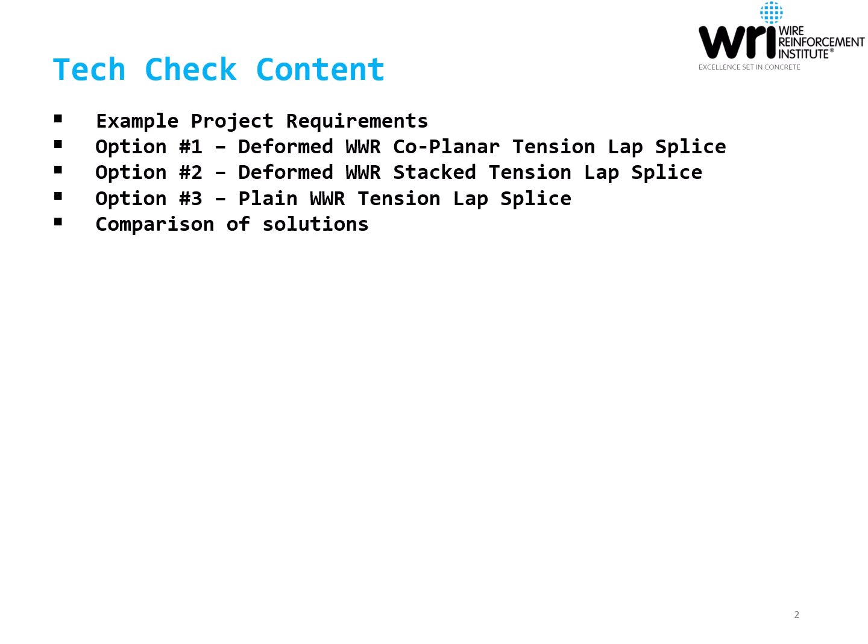So for this tech check, we'll start with an example project to set up some parameters that ultimately inform how the reinforcement can be configured to satisfy an engineer of record's design intent. With the criteria established, we'll then walk through 3 different welded wire reinforcement options. To wrap up, we'll do a side-by-side comparison of the 3 solutions.

So for our example project, we define these requirements. We'll assume a 6-inch structural slab on ground, a 100,000 square foot building footprint. The engineer of record has prescriptively specified an area of steel of 0.17 inches squared per linear foot. Also has prescriptively defined a maximum and minimum spacing as noted, 10 inches and 4 inches on center. There is 1.5 inches clear cover from slab on ground top surface.

We'll assume a steel reinforcement design yield strength of 60 KSI. The concrete design compressive strength will be f'c is 4 KSI. We're using normal weight concrete, and it will be required to have a Class B lap splice per ACI 318. So the welded wire reinforcement solution here would be a 10 by 10 D14.2 by D14.2 for deformed wire, or a 10 by 10 W14.2 by W14.2 for plain wire.

This 14.2 nomenclature simply corresponds to 0.142 square inches, and providing that at 10 inches on center gives an equivalent of 0.1704 square inches per linear foot, which of course satisfies the engineer of record's requirement.

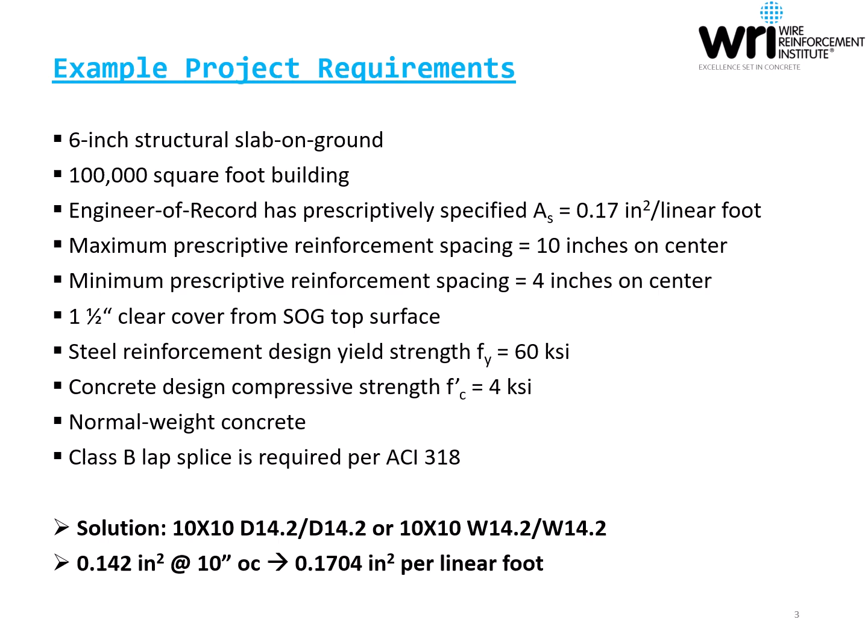With the project parameters established, we'll look at our first reinforcement option, which is comprised of deformed welded wire reinforcement that is configured to achieve what we would refer to here as a coplanar lap. This simply means that the welded wire reinforcement mats, when installed, are able to occupy the same plane without stacking up or creating an unnecessary buildup of reinforcement. This type of lap splice is based on contribution from the deformed wire surface only, so there is no benefit derived from the welded cross wires themselves. In other words, and as we will show in subsequent slides, this lap splice ends up being calculated identically to that of individual pieces of rebar.

If you look at the illustration here, note that the lap splice is intuitively measured as the overlapped horizontal distance from the end of one mat to the end of the second mat. Additionally, in practice, a welded wire reinforcement detailer will typically configure these mats to have overhang dimensions that allow for an uninterrupted typical spacing of the wires that are oriented in the direction perpendicular to the lap splice. So this ends up being really convenient for the placing crew, as there's no guesswork when it comes to laying out the mats. Basically, the overhangs themselves serve as a sort of built-in tape measure, and the final installed arrangement of the mats is able to maintain the typical spacing of wires throughout.

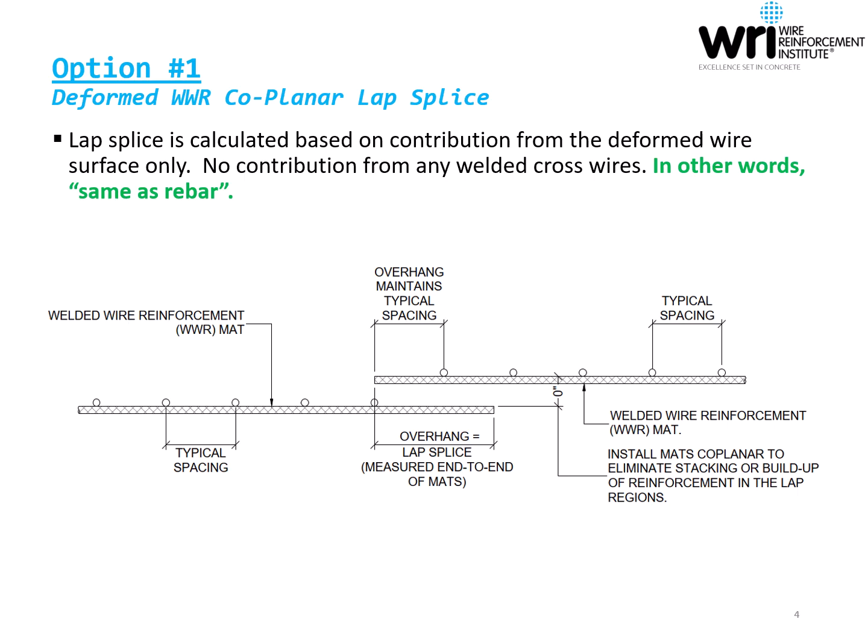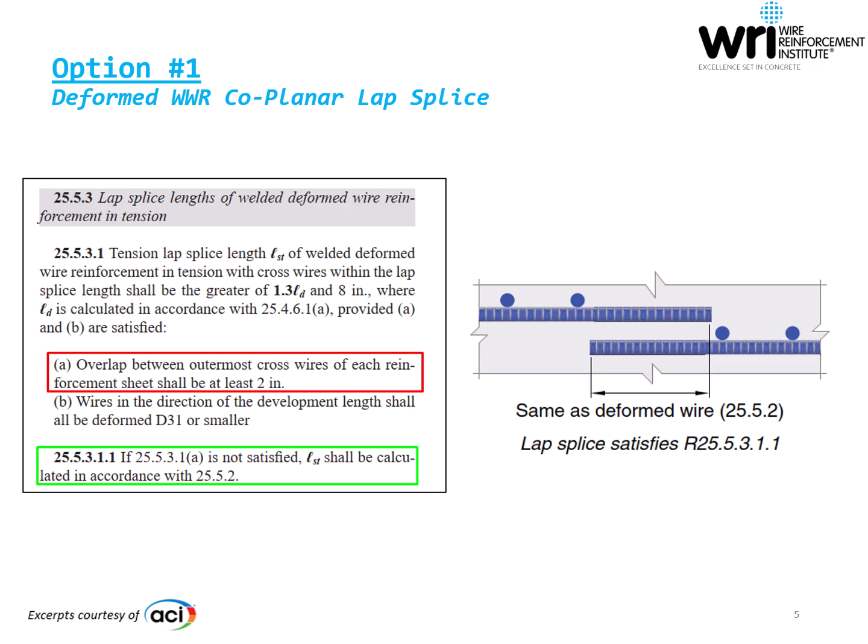The trigger for a coplanar lap splice can be seen in ACI 318 section 25.5.3. Looking at note A, we see that a traditional deformed welded wire reinforcement lap splice would require mats that stack in such a way so as to ensure that there is overlap of cross wires. In the absence of this overlap of cross wires, however, we're actually kicked to section 25.5.3.1.1, where we are directed to essentially disregard section 25.5.3 and head over to section 25.5.2. Section 25.5.2 covers lap splices for individual deformed bars or deformed wires. This actually should look fairly familiar.

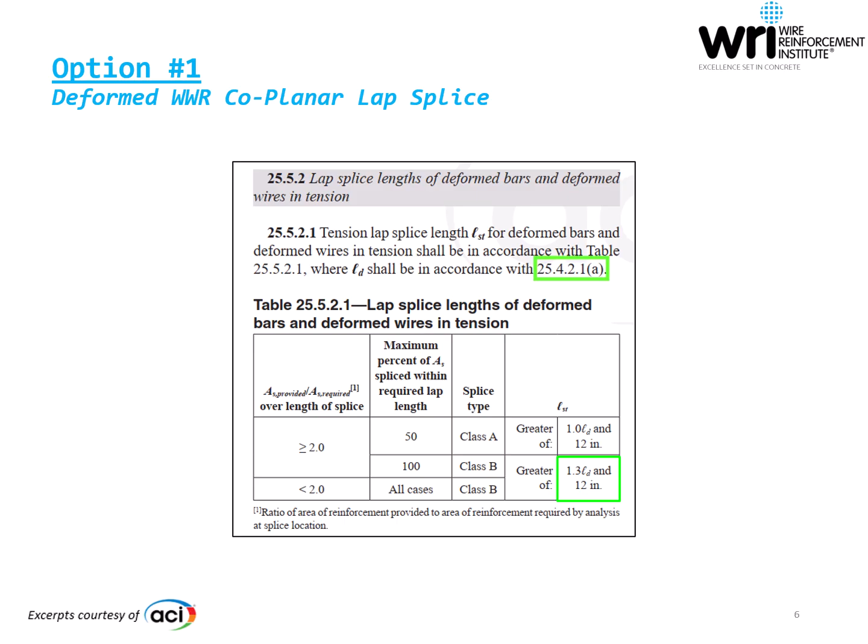So what ACI is telling us is that if we don't have cross wires in the lap splice region of a deformed welded wire reinforcement mat, we derive lap splice length the same way we do for rebar. Since the original problem statement indicated that a Class B lap splice is required, we see here that our lap splice L sub ST will be the greater of 1.3 times L sub D and 12 inches. To find L sub D, section 25.4.2.1a applies.

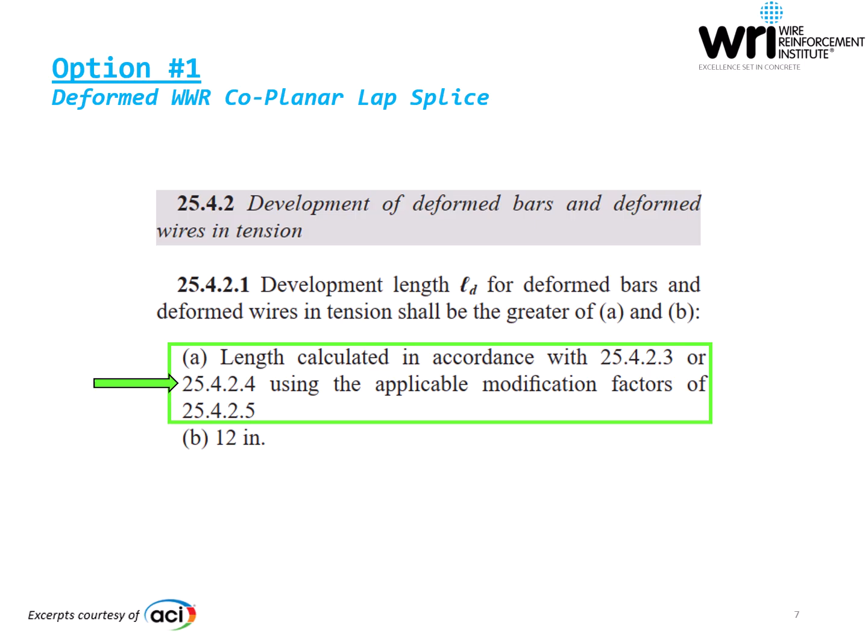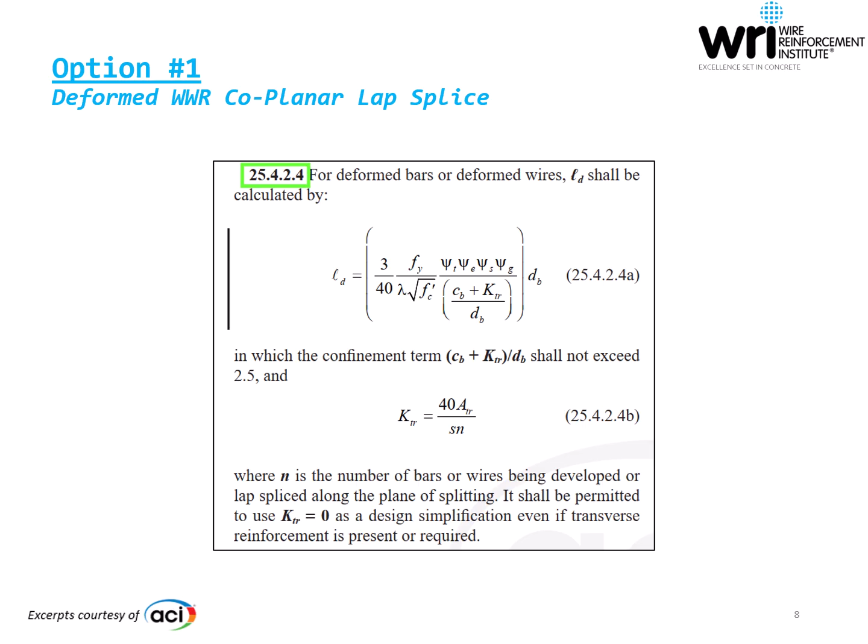In section 25.4.2.1a, we are given a couple options. For this example, we're going to go ahead and use the expanded equation in section 25.4.2.4 to derive L sub d. And here is the expanded equation for L sub d, which should, again, look familiar to anyone who has calculated the development length for individual rebar or individual deformed wire.

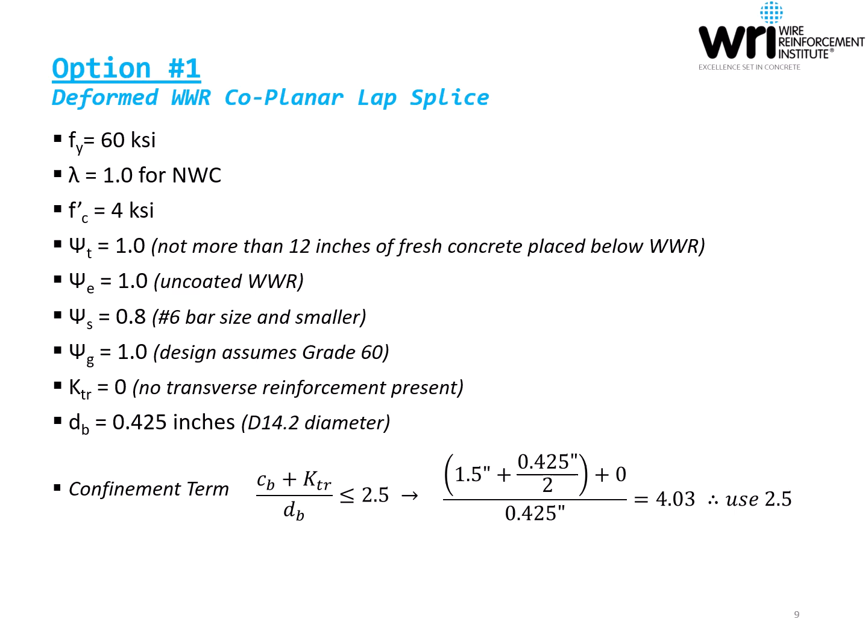If we plug and play then, here are the applicable attributes, including the appropriate modification factors. Note too the calculation of the confinement term, which yields the use of the prescriptive maximum value in ACI that is noted to be 2.5. In equation form then, we arrive at L sub d equal to 9.68 inches. We can now calculate the Class B lap splice length. As shown, we arrive at 12.6 inches. We'll round this up to an even 13 inches for convenience.

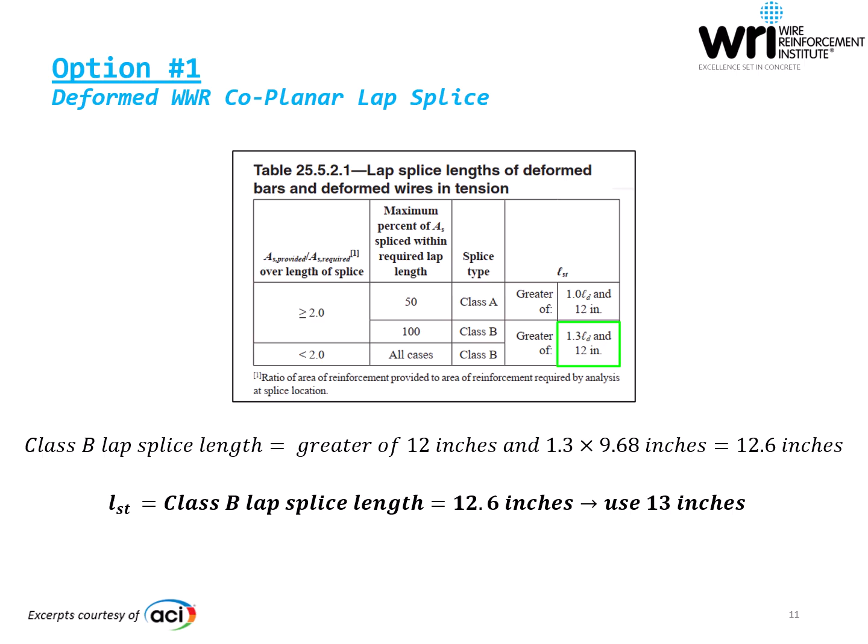Wrapping up option 1, we show the actual configuring of the welded wire reinforcement mat and its representative quantity takeoff. We're going to assume that for this project, as a function of an agreed upon preference between the welded wire reinforcement manufacturer and the contractor, the mats are going to be on the order of about 20 feet long and no wider than 8'6". The 8'6" maximum width is notable because it represents the maximum width that can be carried by a standard truck before additional oversized load permit requirements are invoked.

With all that said, note the resulting mat style here. One of the overhangs is equal to the calculated lap splice length of 13 inches, while the adjoining overhang that will be overlapped is 10 inches long. This yields an effective mat coverage of a little over 122 square feet, with effective coverage indicated by the dashed line. So the result for a 100,000 square foot slab is a gross area takeoff that gives us 819 mats. This equates to about 65 tons of steel, and these results will be revisited later as part of a comparison between the other two options.

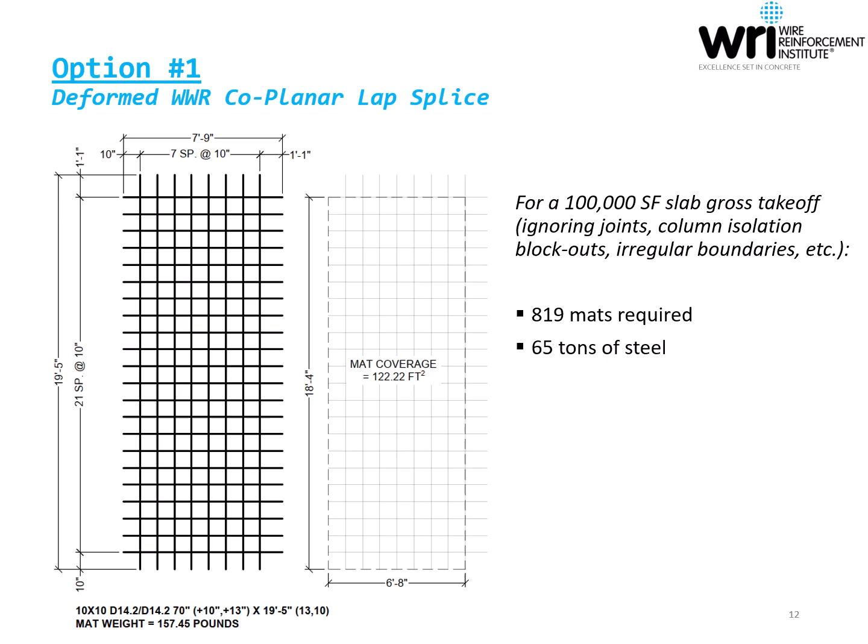Moving into option 2, we have deformed welded wire reinforcement in a stacked lap splice configuration. The key attribute to be aware of here is that the calculation of the lap splice is based on both the deformed wire surface and the presence of welded cross wires within the lap region. As you can see, if welded cross wires are in the lap splice region so that they can be relied upon to contribute to the bond and anchorage, we end up with an unavoidable stacking of the mats where they come together. It's just something to keep in mind.

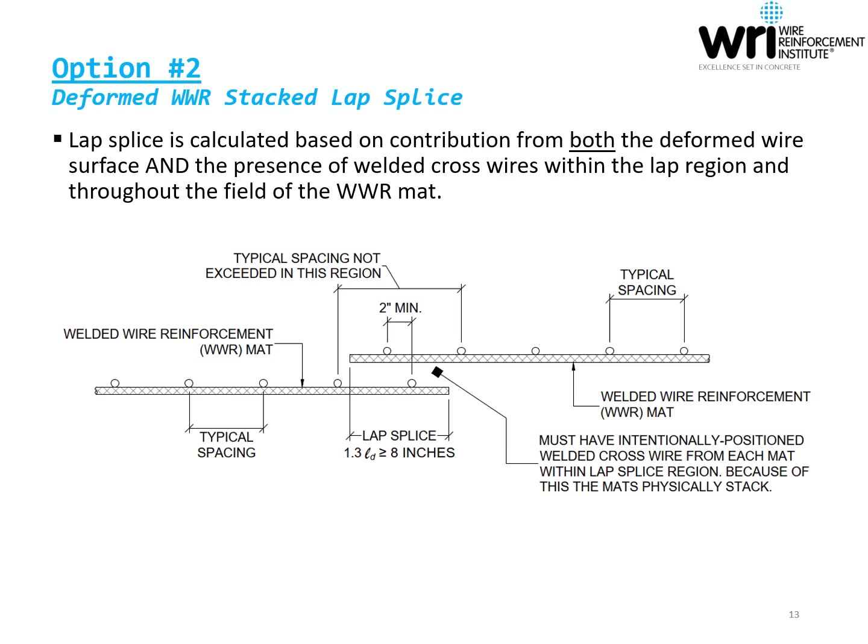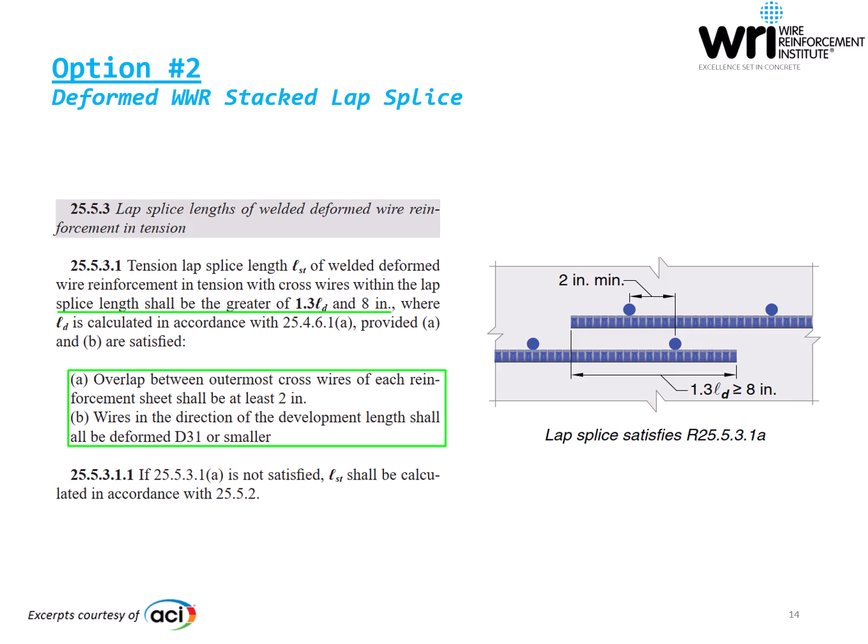Revisiting section 25.5.3, and with the benefit of the illustration shown, we see that both conditions A and B are satisfied. So in doing so, ACI tells us that the lap splice length will be the greater of 1.3 times L sub d and 8 inches, with L sub d calculated in accordance with section 25.4.6.1a. Section 25.4.6.1a kicks us into section 25.4.6.2 for the determination of L sub d.

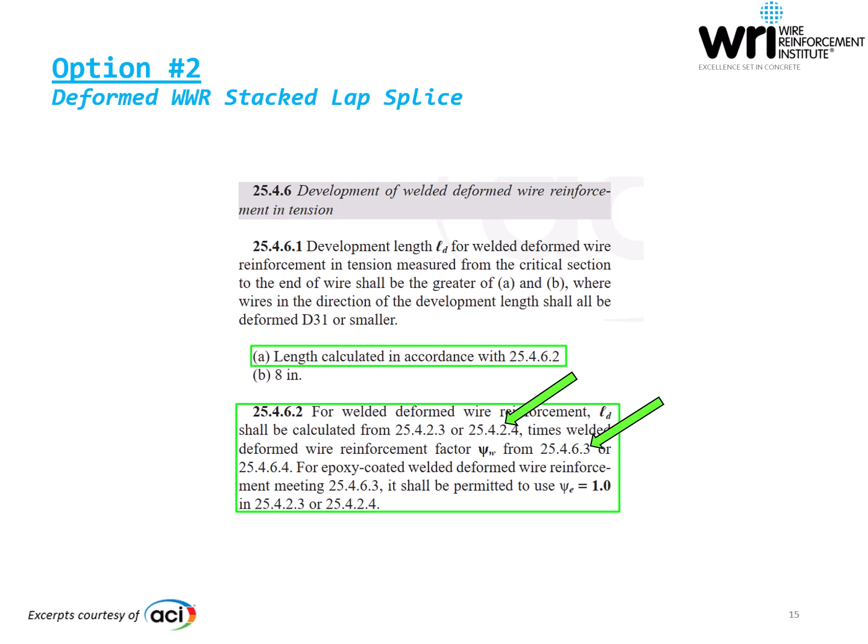The next step is nearly identical to what we saw in option 1 for the coplanar lap splice, in that we will be relying on section 25.4.2.4 again. However, there is one significant difference, and that is the application of a deformed wire reinforcement factor as outlined in section 25.4.6.3. So if we put this all together, we have the familiar expanded development length equation of section 25.4.2.4 multiplied by the deformed wire reinforcement factor of section 25.4.6.3.

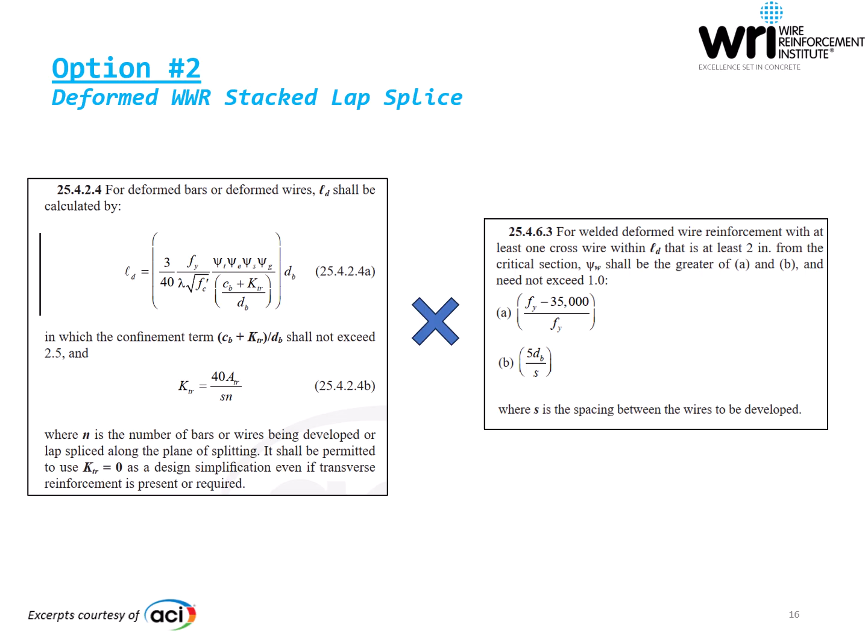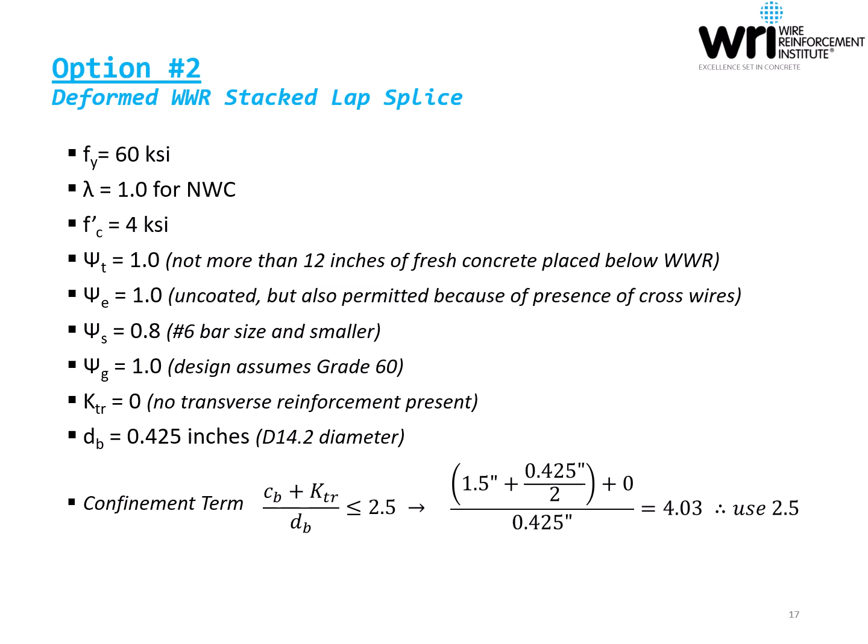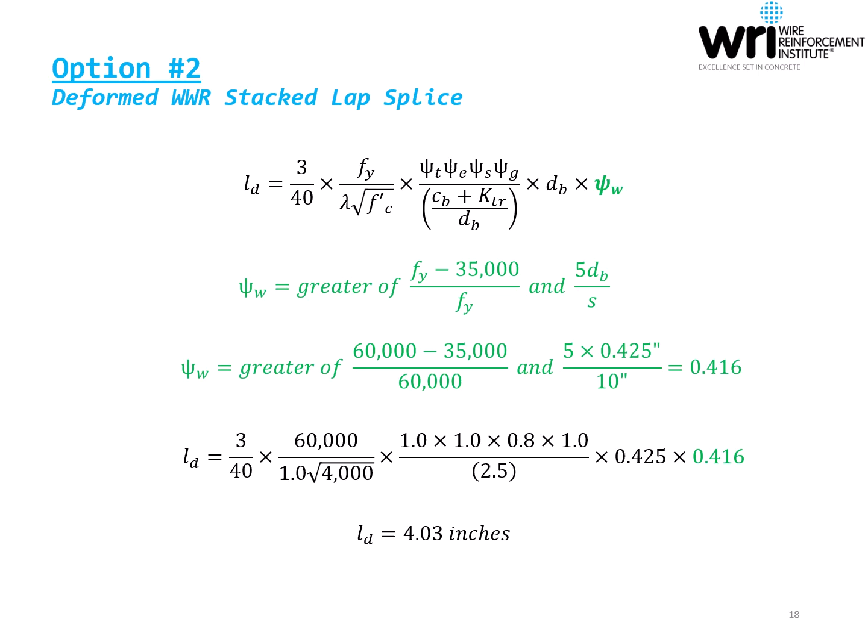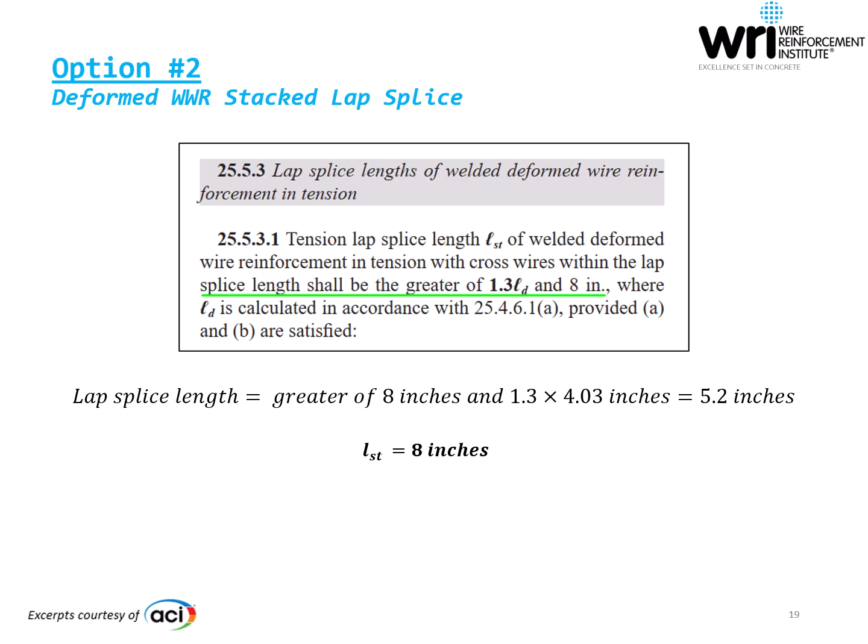Here we walk through the attributes of the development length equation. This part is actually identical to that which we had derived for option 1 previously. But we now take the result of that equation and multiply it by the deformed wire reinforcement factor. This ends up giving us an L sub d that is equal to 4.03 inches. Circling back then, we can now calculate the lap splice length as the greater of 1.3 times L sub d and 8 inches. We see clearly here that 8 inches governs.

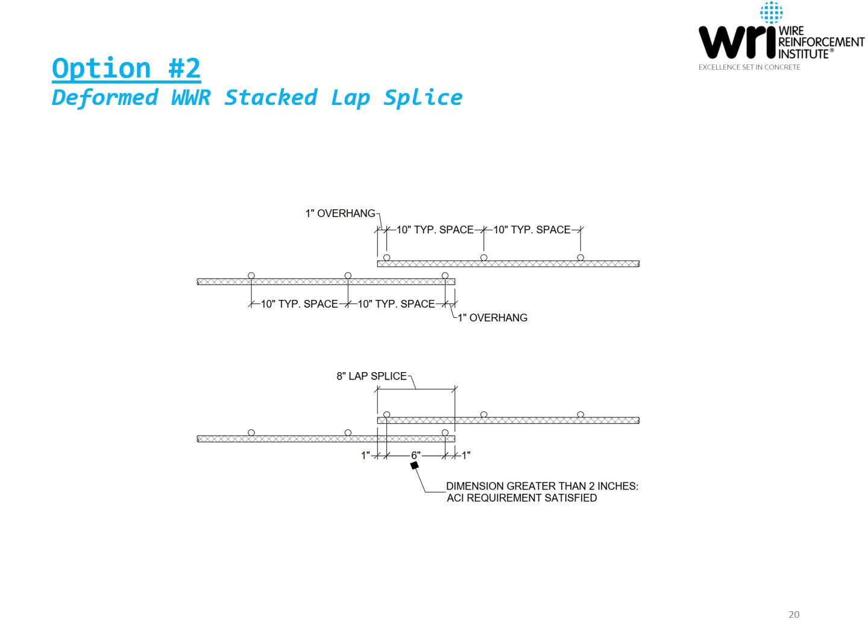So while this lap splice length is certainly shorter than what we calculated in option 1, not only is there some material buildup to be aware of due to the stacking, but there is also a bit of a disruption to the regular cadence of the typical reinforcement spacing that occurs everywhere else on the mats. This, of course, isn't impossible for the contractor to achieve in the field, but it does require a bit more attention to detail than in option 1, where we could simply use the overhang length as a sort of built-in measuring stick.

And here we see the culmination of the efforts for option 2, arriving at a mat style with coverage that is a bit more than 146 square feet. Again, effective coverage is indicated by the dashed line and is based on the overlap relationship we showed in the previous slide. From here, we derive a mat quantity and corresponding steel tonnage as representative of a gross area takeoff. You can see that the mats are fewer than what we derived from option 1, and the tonnage is actually a little bit higher.

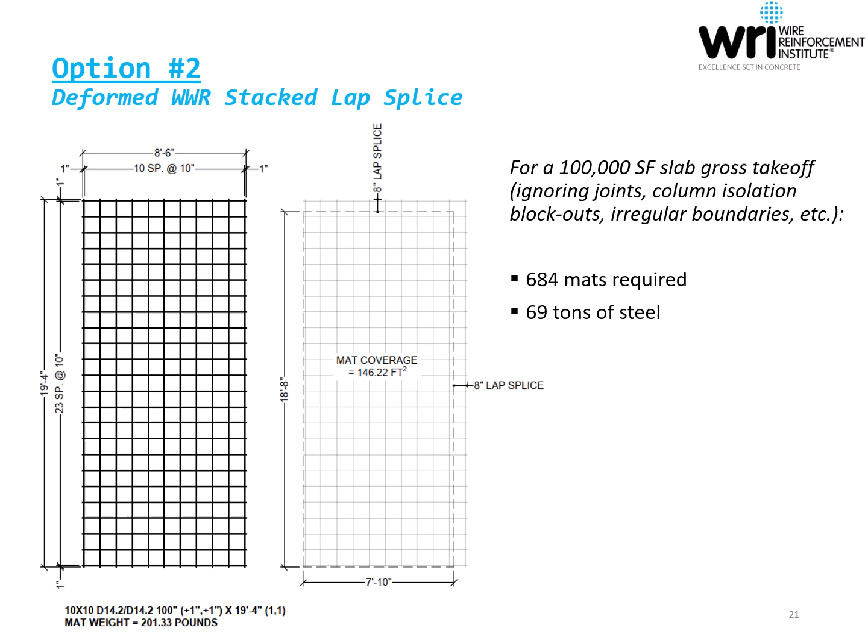It is worth pointing out that if you are going to rely on the presence of welded crosswires within the lap splice region to contribute to bond and anchorage behavior, you must also satisfy a prescriptive maximum wire spacing throughout the balance of the mat's area. And this is noted in ACI section 20.2.1.7.3. This prescriptive maximum spacing is 16 inches. Of course, we've satisfied this given that the mat we have configured here has a 10-inch wire spacing.

Again, this prescription only applies when there is contribution from welded intersections being relied upon for the bond and anchorage of the mat. In contrast, for option 1, that we previously derived based entirely on anchorage and bond contribution from the deformed wire surface only, section 20.2.1.7.3 does not apply.

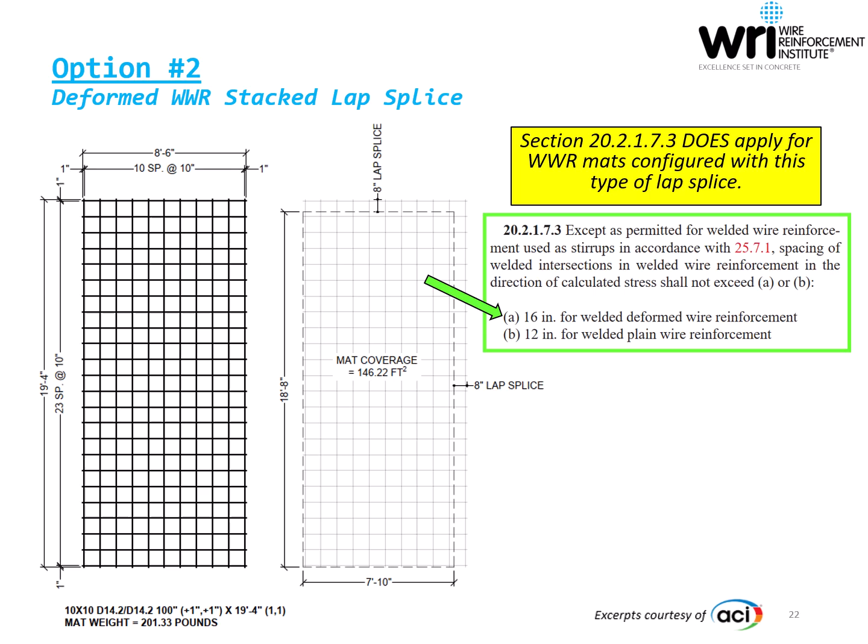We'll now move into our final option, which is comprised of plain welded wire reinforcement. For this lap splice, the bond and anchorage behavior is entirely reliant on the presence of welded crosswires. This is because the wire surface is smooth and as such cannot contribute to bond or anchorage.

Note that the lap splice dimension is measured from outermost center lines of crosswires on the lapped mats, independent of overhang, and there is an additional implicit requirement that a 2-inch minimum offset be achieved. We can see here that there is a significant departure in the ACI design routine for lap splice calculation, and that it doesn't really resemble the equations we saw in options number 1 and number 2.

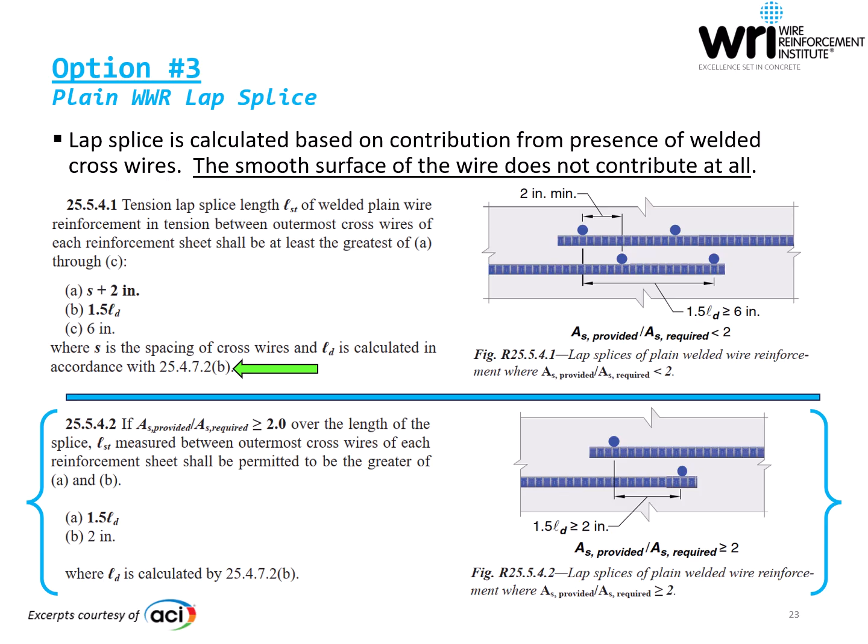Section 25.5.4.1 applies here since the ratio of steel area provided to steel area required is less than 2. Section 25.5.4.2 is also shown in brackets at the bottom, but it doesn't really apply to our example. Note the 3 different provisions listed as A through C, the greatest of which will be used as the tension lap splice length. Provision B tells us to go to section 25.4.7.2b for the determination of L sub D.

When we arrive there, we see a fairly straightforward equation, the result of which is 3.64 inches for the problem statement that we're working here. So lap splice length is the greatest of spacing plus 2 inches, which would give us 12 inches, 1.5 times L sub D, which gives us 5.46 inches, and a prescriptive value of 6 inches. So our lap splice length is 12 inches.

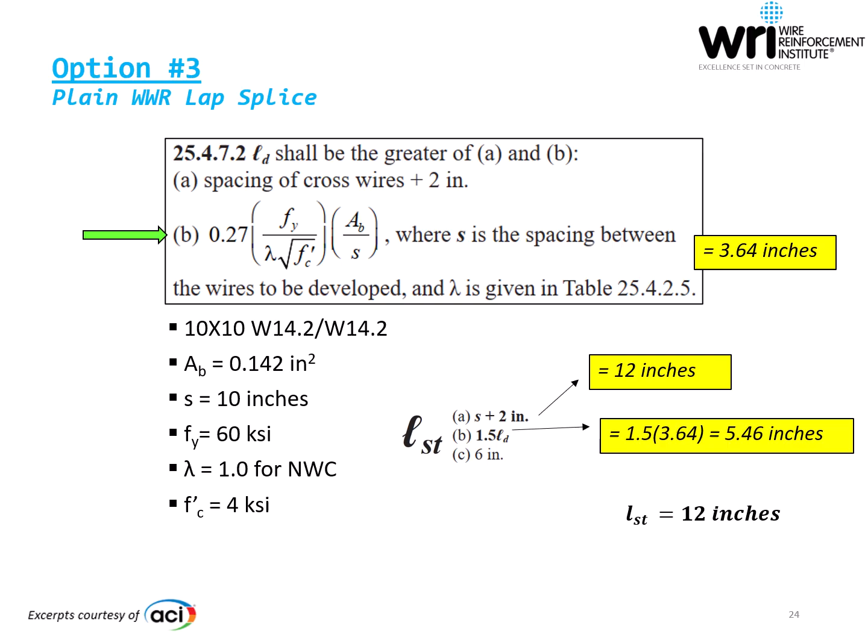With the lap splice length in mind and the requirement that we have a 2-inch minimum crosswire offset that we need to satisfy, we configure the lap splice that we show here. Note the 12-inch measurement wire to wire and the 2-inch offset that is integral within that region. While we've arbitrarily selected a 1-inch overhang here just as a representation of a practical minimum for manufacture, these overhangs could be longer. At 1 inch, note that the overall mat overlap dimension ends up being 14 inches.

But again, this end-to-end dimension does not represent the actual lap splice dimension. The lap splice is the 12-inch dimension from outermost crosswire to crosswire. Generally speaking, for plain welded wire reinforcement, overhangs that occur to the outside of the lap splice itself are structurally irrelevant, and they offer no benefit in the calculation. That said, from a reinforcement placement standpoint, it still might be prudent for the designer on their construction documents to speak in terms of mat overlap, as this could make the task of the sheet layout simpler for the contractor to keep track of from one mat laydown to the next.

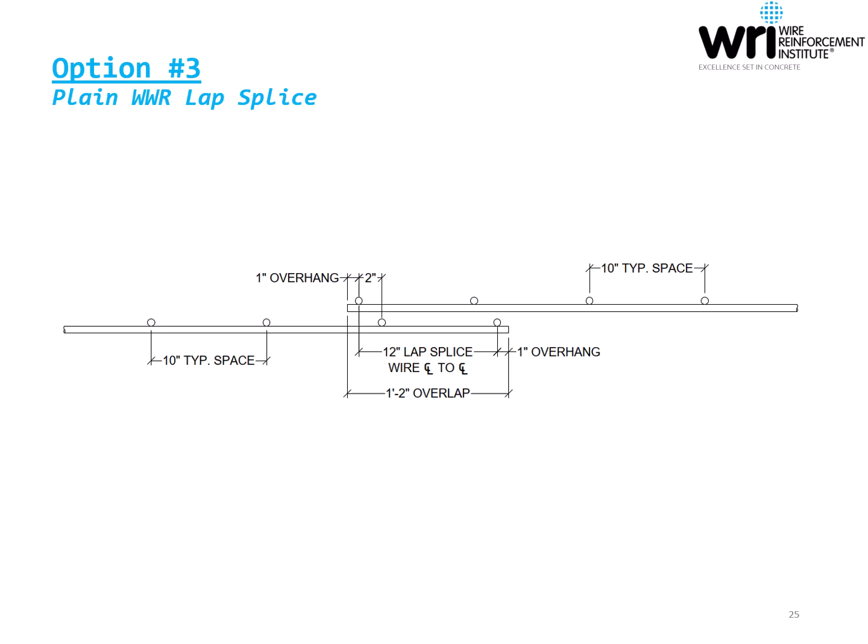Finally, note that this type of lap splice is also characterized by an unavoidable stacking of the mats given the required cross wires positioned within the lap region. Here is the culminating information for option 3, with mat quantity and steel tonnage representative of a gross area takeoff. The dashed line represents the effective coverage of a typical mat, coming in at a bit more than 133 square feet, and derived based on the lap splice configuration shown on the previous slide.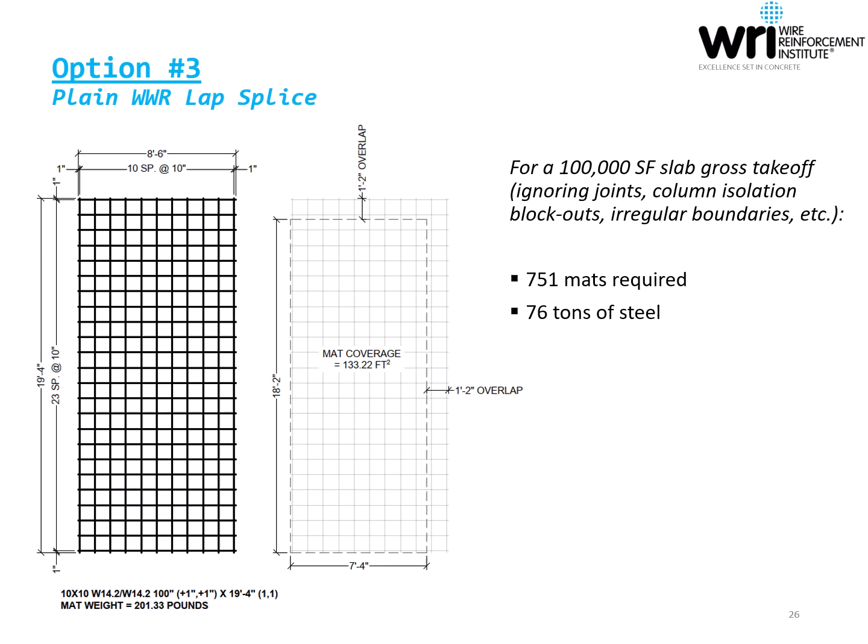Similar to option 2, anytime welded wire intersections are relied upon for bond and anchorage, other than those used as stirrups, ACI requires that there be a prescriptive maximum spacing of wires throughout the field of the mat. Here, for plain welded wire reinforcement, that prescriptive maximum is 12 inches, which we of course satisfy with the 10-inch spacing shown on the mat that will be used.

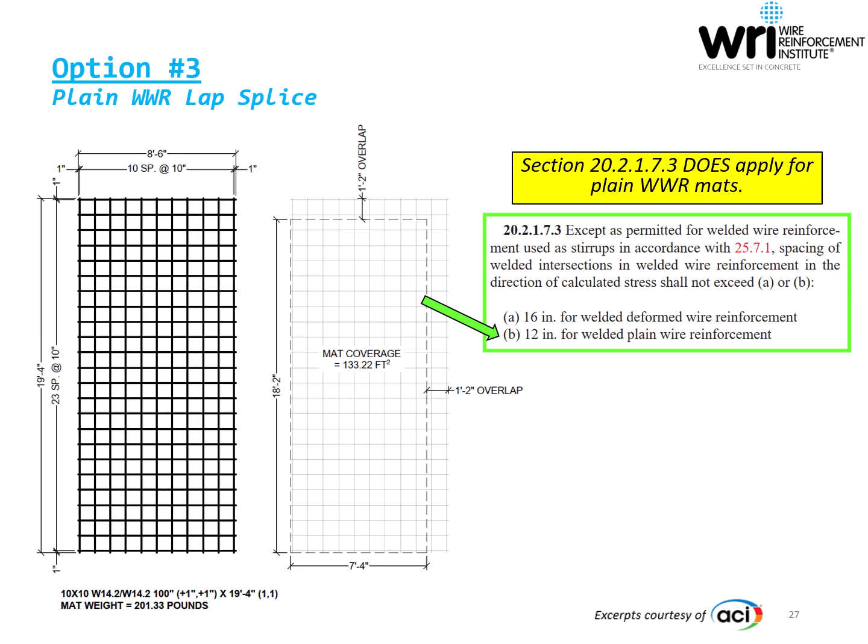Additionally, for the deformed welded wire reinforcement coplanar lap, the added benefit is that all of the steel remains in the same plane, so there's no buildup that can potentially affect steel positioning within the depth of the concrete element. This is by far the most preferable arrangement from a design perspective. The one trade-off for the deformed coplanar option is that there is obviously a larger quantity of deformed welded wire reinforcement mats, but keep in mind that these mats are lighter.

Each one of them's 150 pounds each, and that's in comparison to the other two options where the mats weigh at about 200 pounds each. So the increased quantity coupled with the lighter mat weight ends up likely being somewhat of a wash. Overall, the takeaway is that while all three options are viable solutions and are code compliant, the deformed welded wire reinforcement option with coplanar lap splices is generally considered to be the most cost and labor efficient solution of the three, and is preferable from a design perspective.